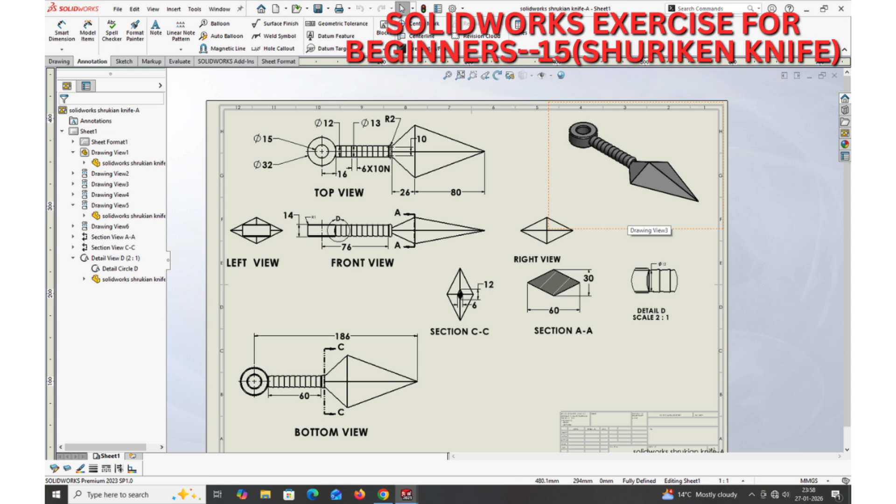Hello everyone, in this exercise of SolidWorks we will create this Shuriken knife. This knife is used in Japan.

Okay, there are the different views of this knife. This is the top view, this is the front view, left view, and this is the bottom view. There are section views also.

Section A, this is section A. Actually this is the parallelogram. Height is 30, 60, and section CC. This is a small parallelogram and the bigger parallelogram.

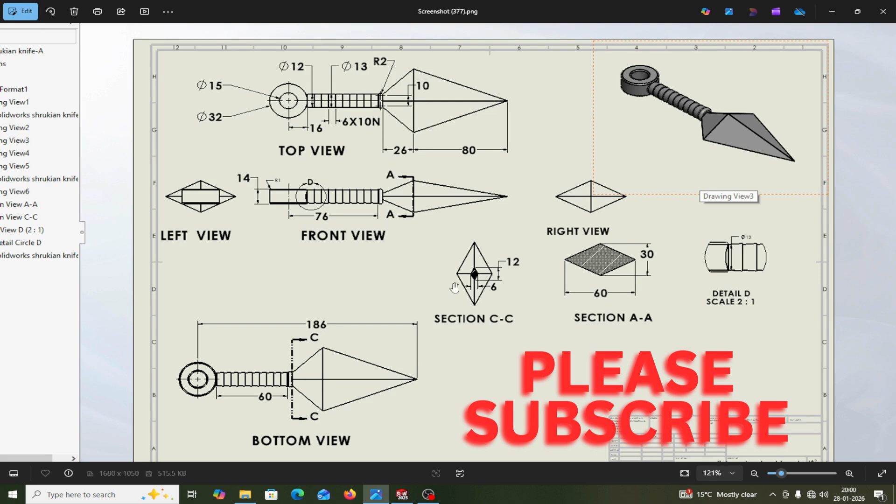Small parallelogram is 6 mm width and height is 12 mm. And this is the detail view of this portion. I will start the detail view of this thing.

The maximum larger dia is 13 mm, 12 mm. First I will draw this circular portion. Dia is outer dia, inner dia is 15 mm, 32 mm is the outer dia. First I am making this one.

Okay, let's start. File, new, part, this one. I am selecting background as plain white and unit system as millimeter gram second. You can select as per your requirement any other systems.

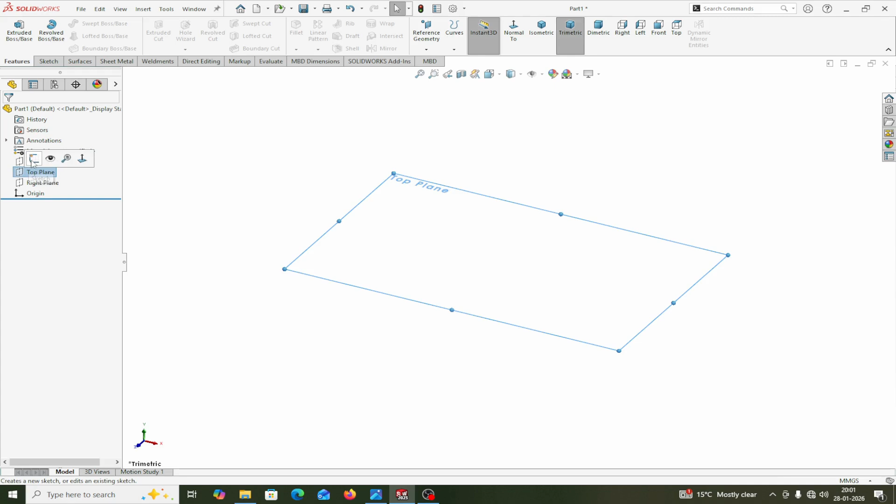Okay, first I am taking the top plane here. Top plane is sketch. I am drawing two circles here.

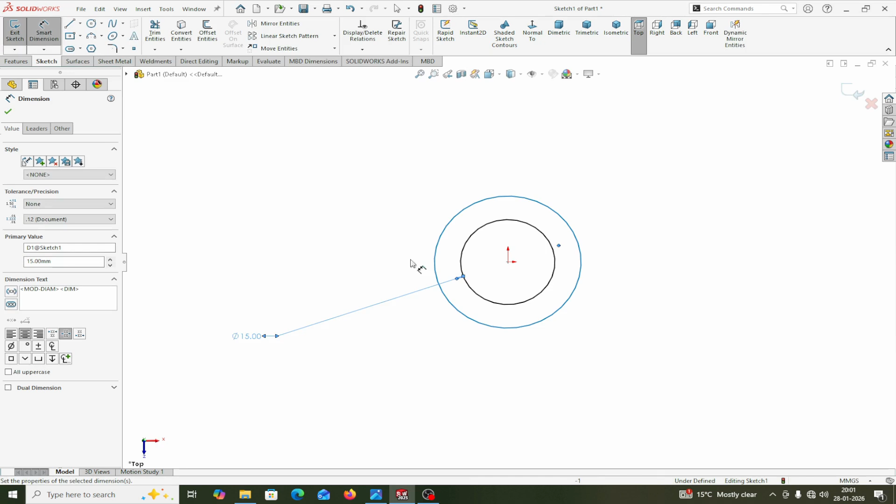This one, this, and this. Okay, right click, select smart dimension. This is 15 mm dia. Inside dia is 15 mm and this is the 32 mm dia as per drawing. Okay, these two dia, this one.

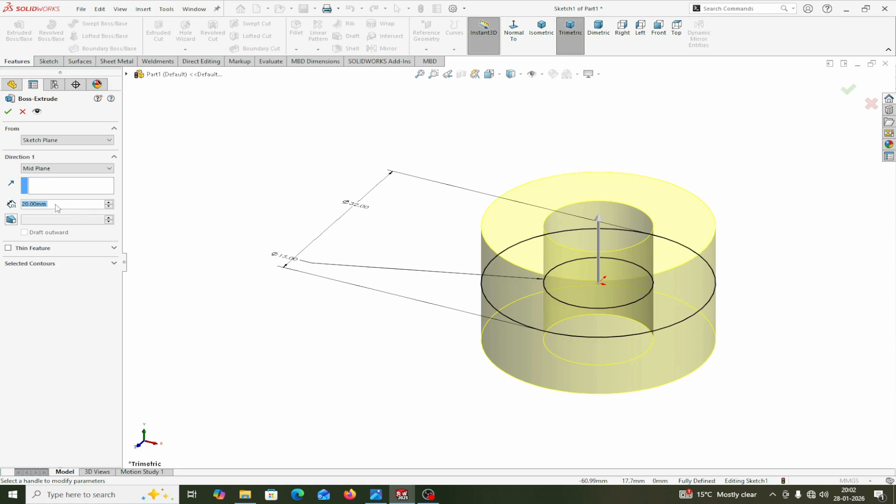Now feature, extrude boss base, I am taking mid plane. Direction 1, mid plane extrusion height, total height is 30, this is 14 mm. This is the total height of this thing. If you see this height, this I have made, this is the 14 mm height of this thing.

Now I will make this one, this inside portion. If you see, bigger dia is 13 mm and this is the tapered part, stepped part. Small dia is 12 mm, 13 mm, and distance between one pattern is 10 mm. These are 6 number of patterns here.

You will see here, total distance is 16 from center to here. Total is 76 from here to here. Okay, from the center point up to the 6th pattern, that is the 76 mm distance.

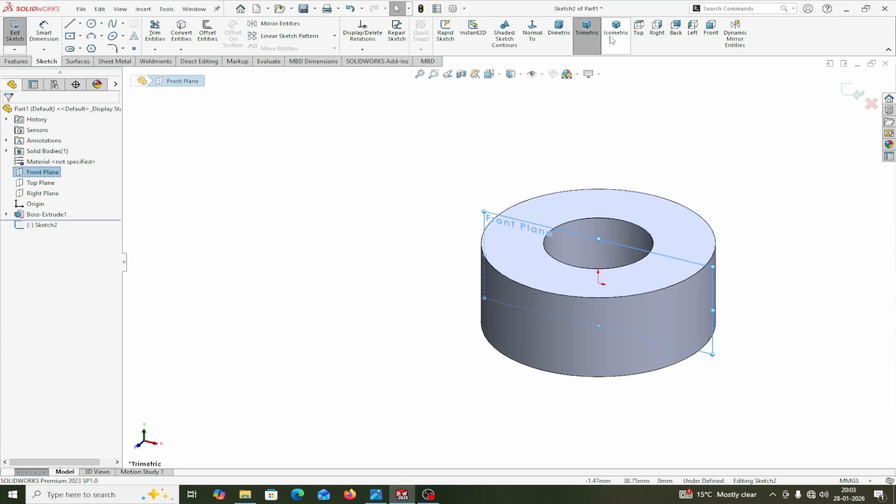Okay, let's make here. Front plane, front plane sketch, normal. I will draw a center line. Center line is very useful in order to draw a proper sketch. It acts as a guide actually.

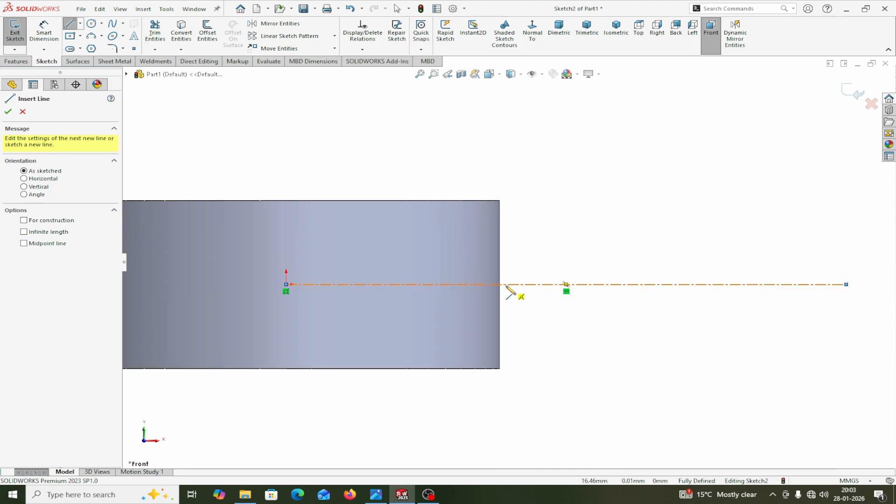This one, first make sure this should be horizontal. Yes, okay. Now I will draw a line from this point, this point, this slightly taper, this is the taper part, and join this one.

Okay, this one. Now smart dimension from this point, select this center line, and if you go beyond this construction line, it will show the dia. If you go below this construction line, it shows the radius. Please note this thing, but this must be a construction line.

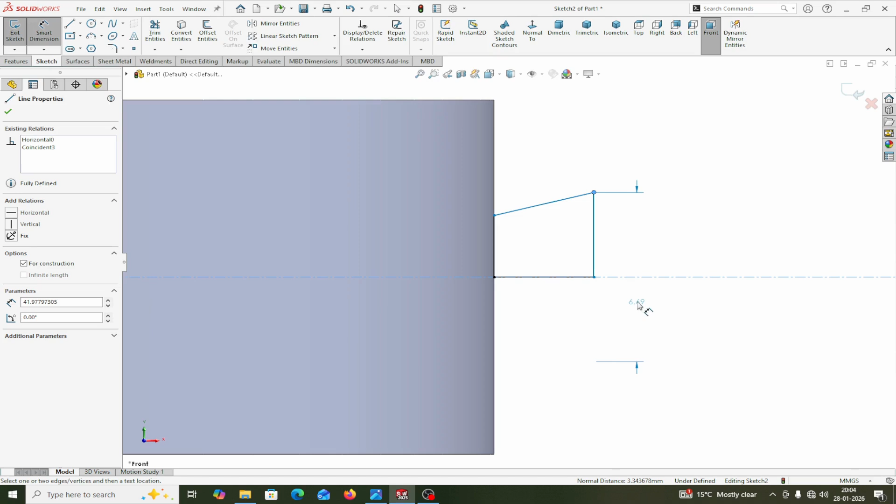Don't select this line, select this line, and this is the 13 mm. Okay, and this point and construction line, this is the 12 mm, and this one, and one more dimension, this one. This dimension is 6 mm. Okay, this one. Oh, this.

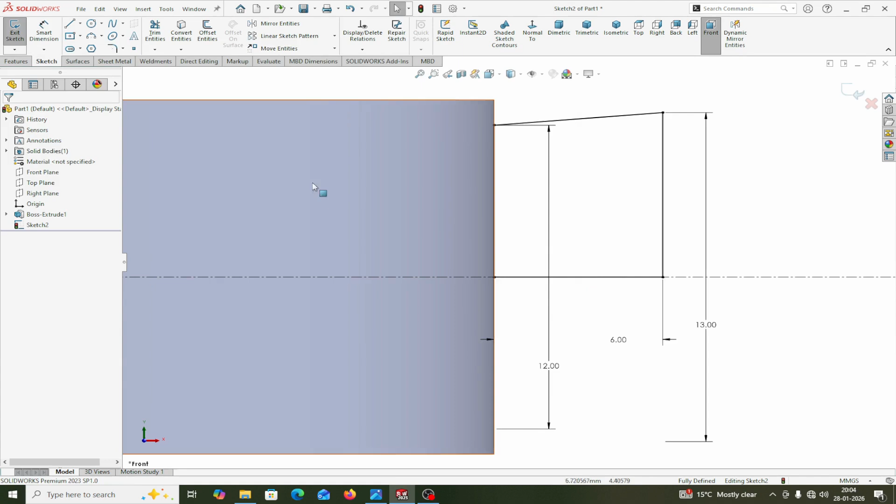Now one more thing, if you see the drawing, this portion, this one, last one. If you see here, this radius is 10 mm and you will see this portion. This center to center distance is 10 mm, radius is 2 mm.

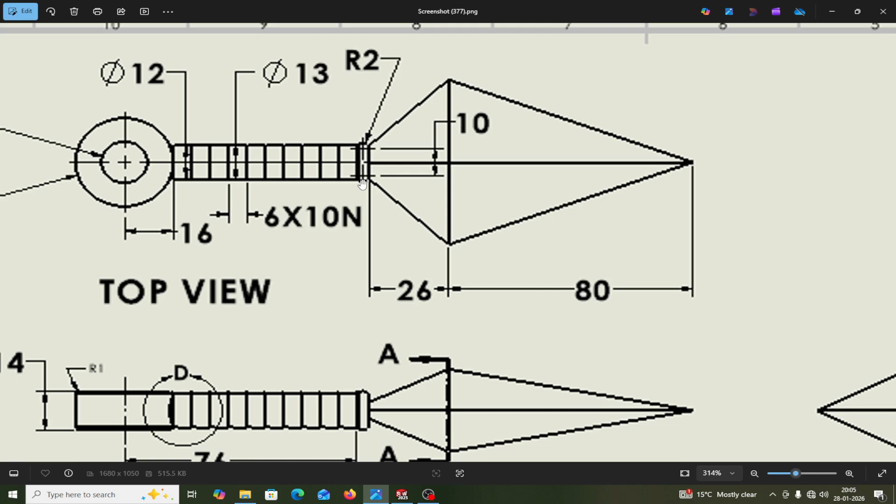Okay, I will draw this one. Total is 14 mm. Total is 10, this one, and 2 plus 2, 14 mm. Okay, total is 14 mm. Let's start. Line, this one.

Don't make the relation here. This, go ahead, then go back, come back. This one, this, and this one. Okay.

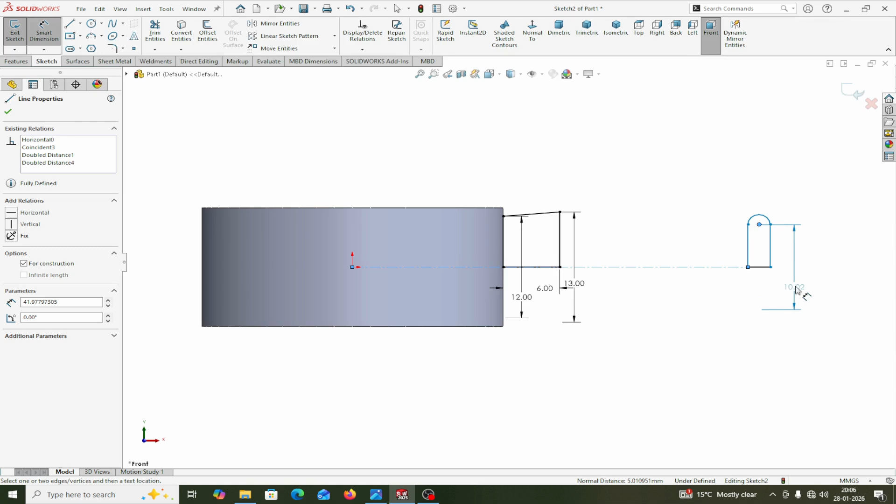Again, select this center point and center line. This will show the diameter. If you go below this construction line, it will show the radius. Please note this thing this way. This is 10 mm only. This is 10 mm, radius is 2 mm, this one.

Now this one. These two lines must be solid lines. Please note, they are two geometries. One is this tapered part, this is this radius part. These two lines must be either straight solid line or construction line.

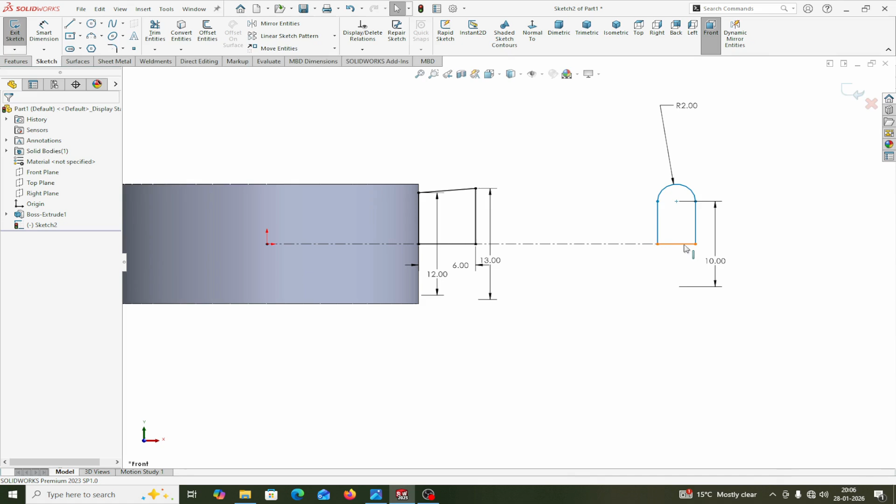In that case, I will make a revolve base feature. Revolve base feature, both are selected. Revolve 360 degrees. Unmerge this one. Please note, unmerge this. If you see in the feature tree manager, there are three parts. Solid body 3 is, one is this one, second is this one, third is this one.

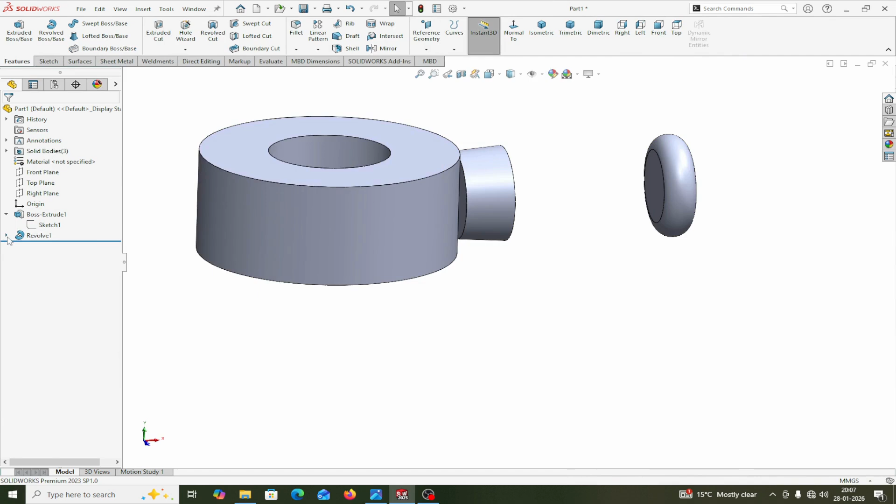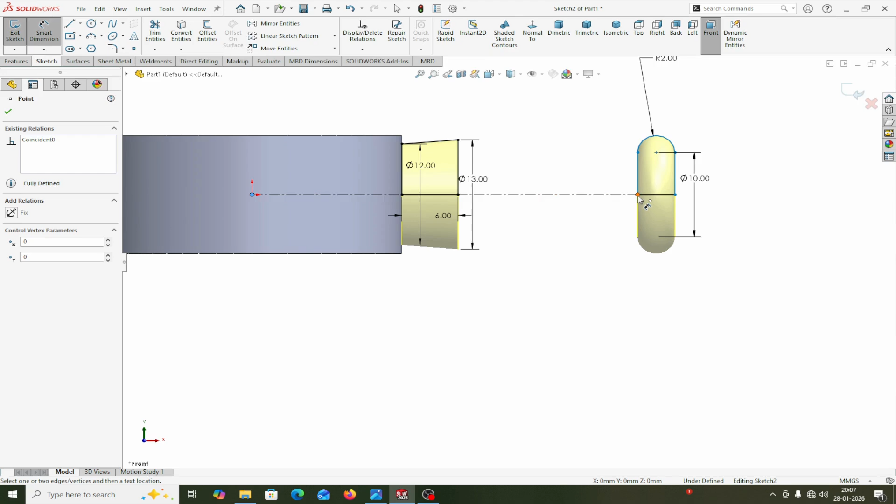I have to make these 10 number patterns. So this is 6 mm, 6 mm, total 10 mm. 6 into 10 is 60. So this distance from here to here, that is 76 mm. Please note, I have calculated this because this distance is 6 mm. I will make 10 number of patterns of this size. So from center to this one, this diameter is 16, diameter is 32. Half of this is 16. 16 plus 60, that is 76.

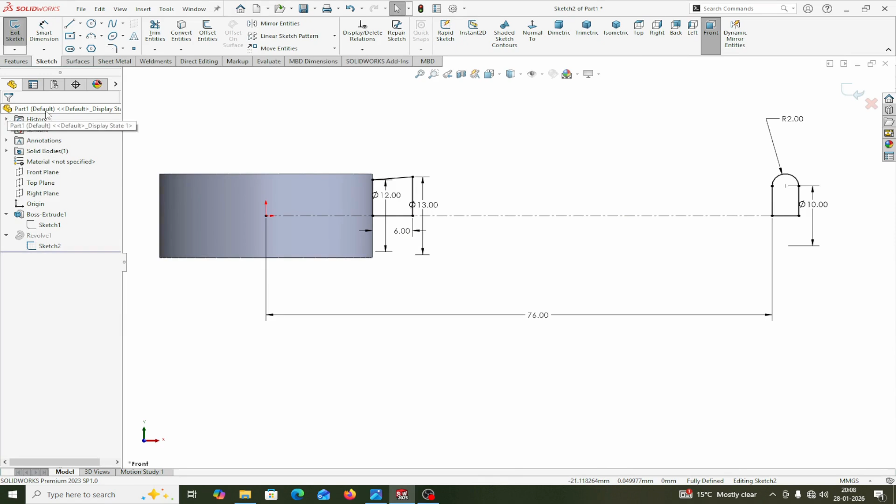Now these are the three feature tree manager. You will see there are three bodies unmerged. This one, this. Okay. Unmerged, red, okay, from here. Later on, I will merge this thing.

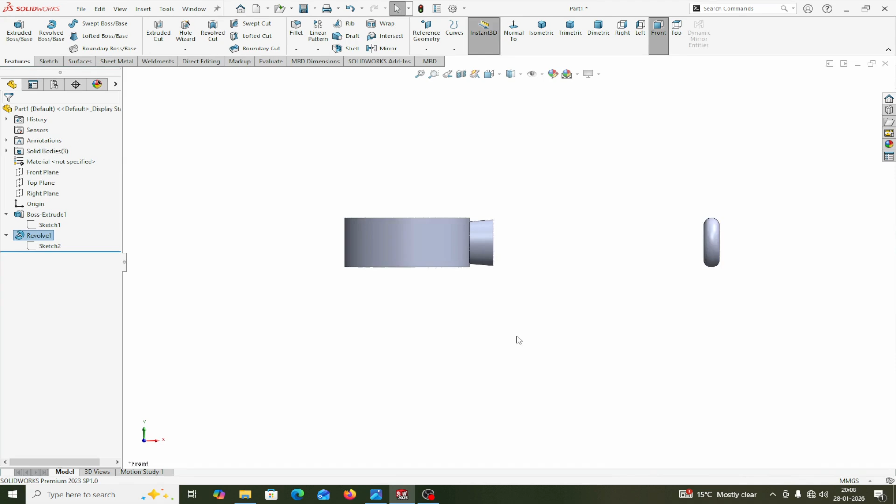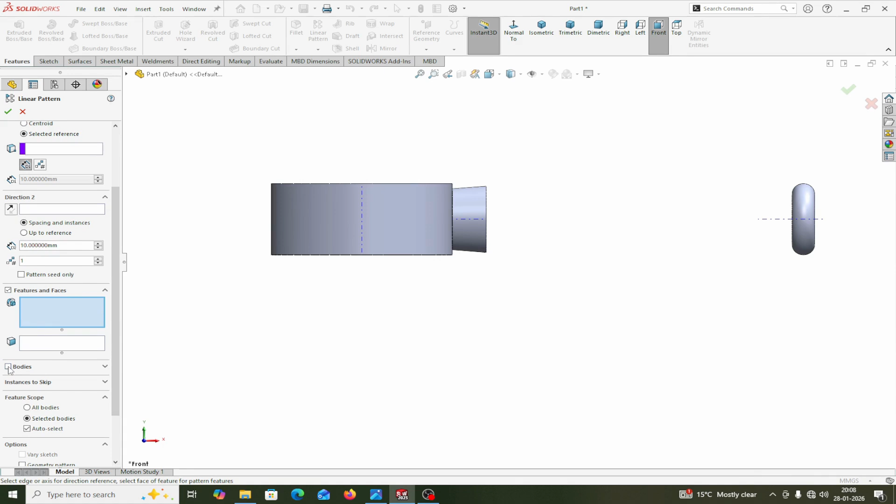Now I will make a 10 number pattern of this one. Go in the linear pattern. From here, select this temporary axis. Select not this. Clear? Select the bodies. Select the bodies, this one, this body, this body. Now select the axis. This one, this one.

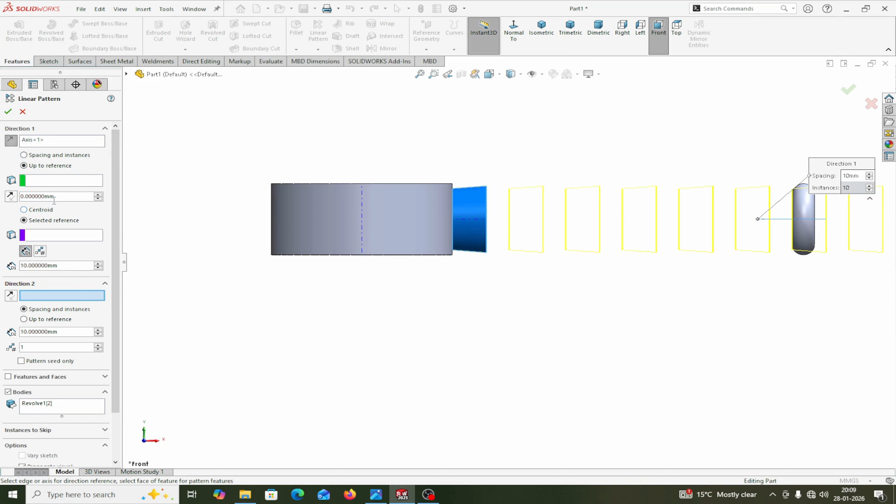If you take up both options, you can use up to reference. Up to reference is this reference. This reference. Up to reference, this one.

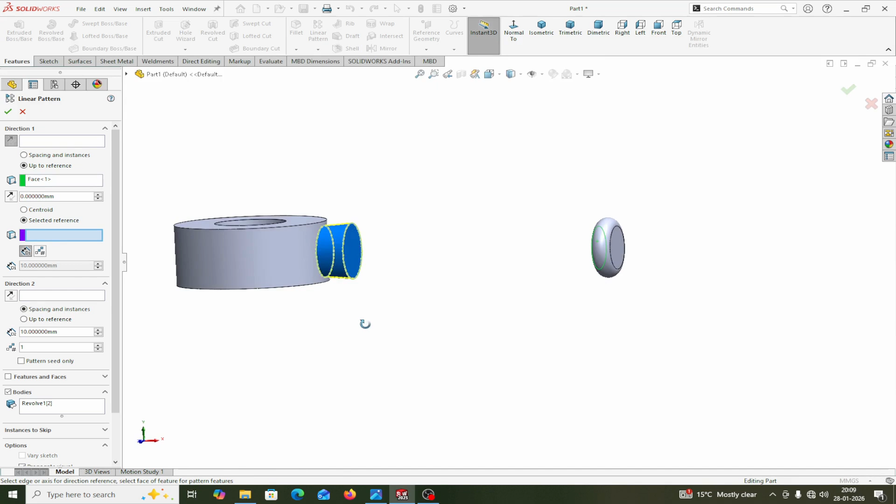And selected reference, this one. Direction, this one. Please note this thing. I am using the second option, up to reference. Direction, this axis, temporary axis, and face. This is up to reference. Up to reference means this one, this one. Selected reference, this face, this one. This face, there are two options. You can select this one also, this one.

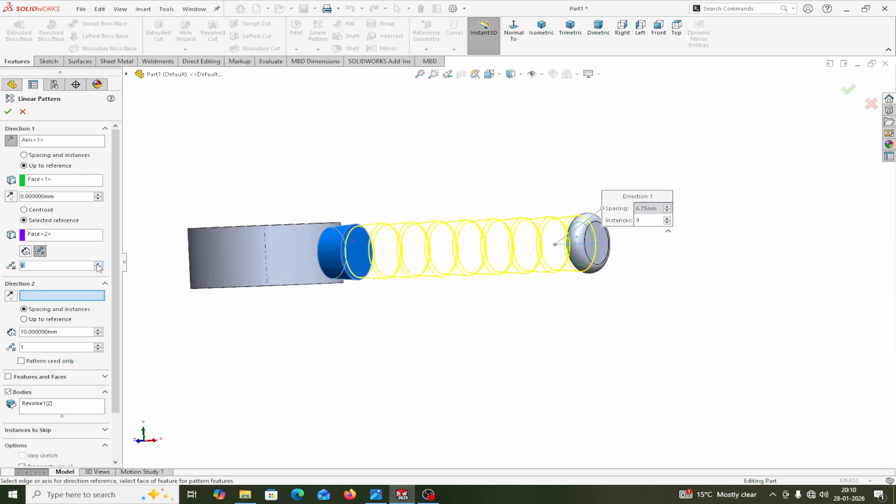9 number I have made, because from here to here distance is, total distance is 60 mm. Okay, now hit OK. Now you will see there are 12 bodies here. This one.

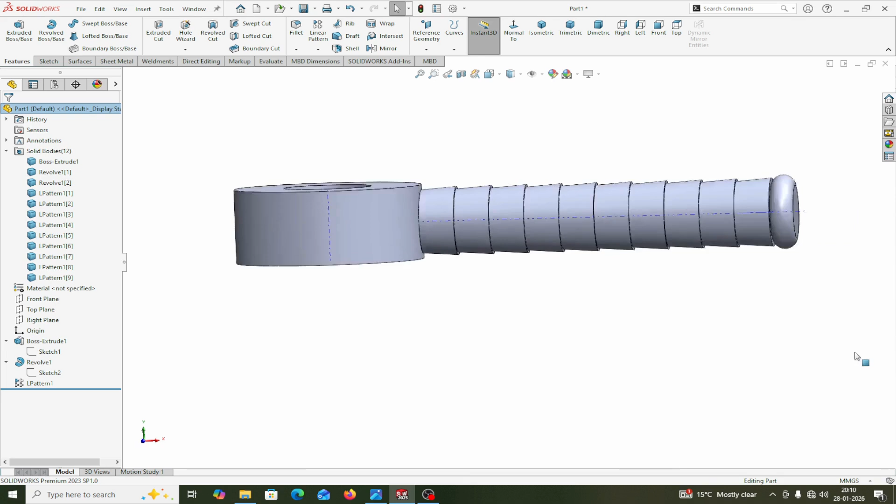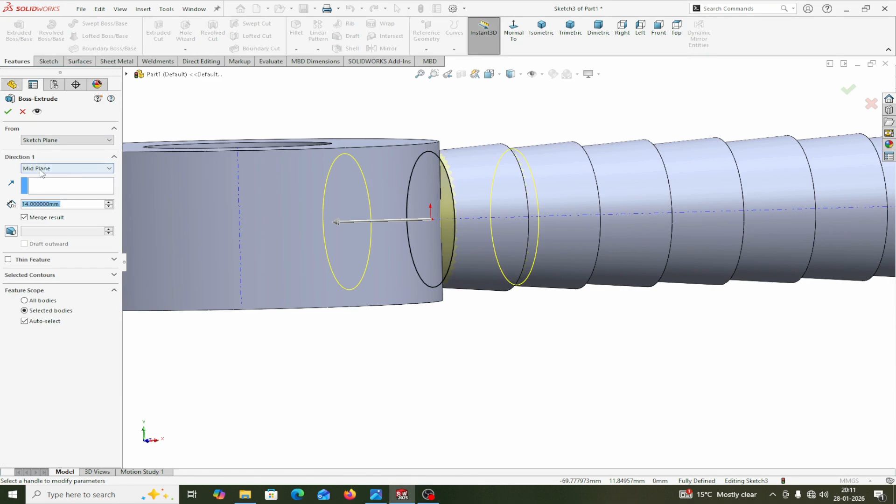First I will merge this corner body, this pattern, and this one. How will I merge? First I will merge this one. You will see there is a gap here. There are two ways of merging. You can go in direct editing, then combine here, or you can select this gap face, sketch, convert entity, feature, extrude boss base. But for direction one, select the option up to surface. Which surface? This circular face. This will merge.

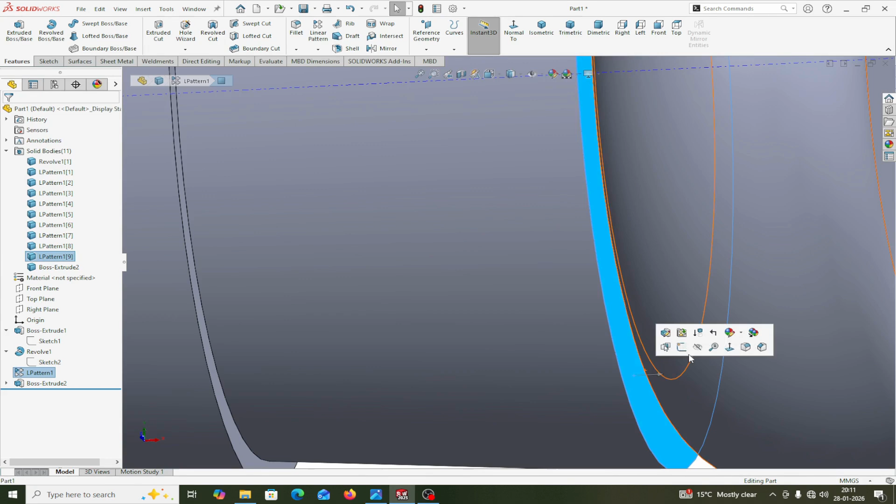Okay, now this is merged with this one. In the same way, you will find there is also a gap here. You will see this gap. So select this face, sketch, convert entity, feature, extrude boss base. Up to surface, which surface? This one, this one.

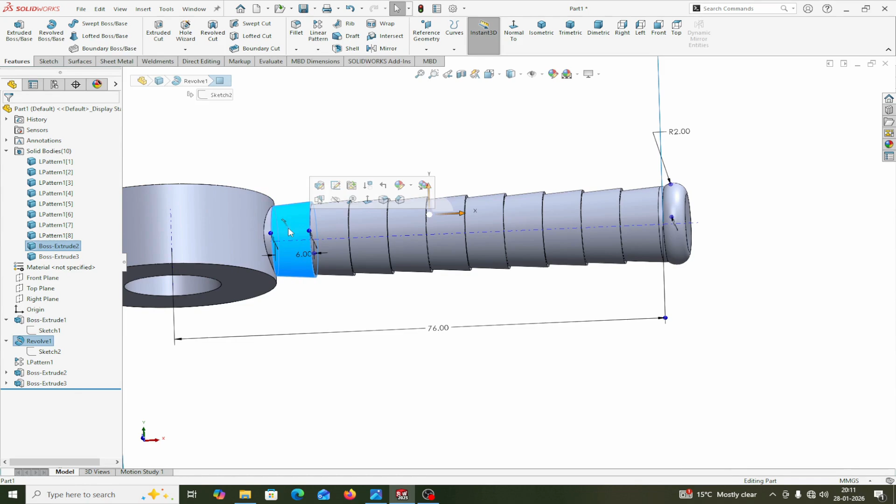You will see this body is merged, last pattern is merged with this one. You will see this one and this one also. Now there are 10 bodies left, this one.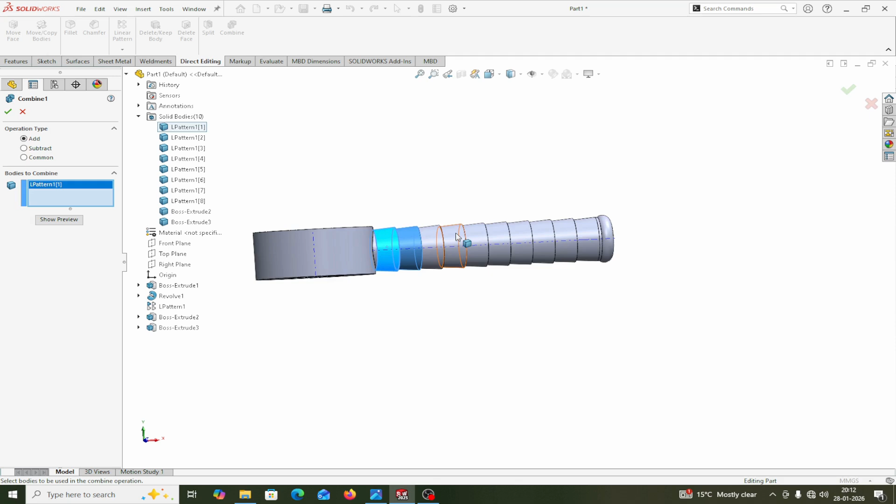Now I will merge, combine these bodies. How will I combine? Go in direct editing, combine, add this one. From here, open the tree manager, select this one. You can also select from the graphic area, or from here tree manager, solid body, this, and hit the right button. All are combined. Now you will see in the feature tree manager, there is one body that is combined, this one. Now this is combined.

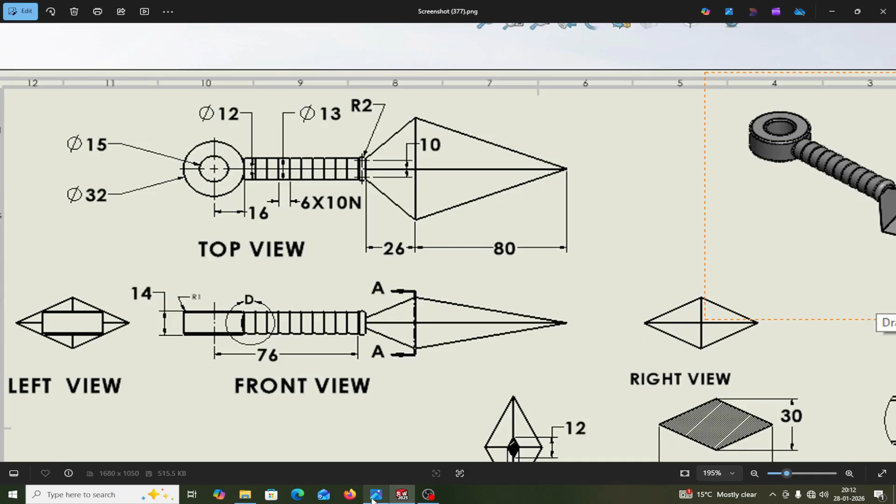Now if you see the drawing, now I will make a small parallelogram here on this face, this circular face. I will make a small parallelogram 6 and 12 mm. Later on, at a distance of 26, this parallelogram will be 30 and 60, and then I will make a loft feature, and again then at a distance of 80. Then at 80, I will make only a simple point. Then first I will loft this part, and then second is this loft part.

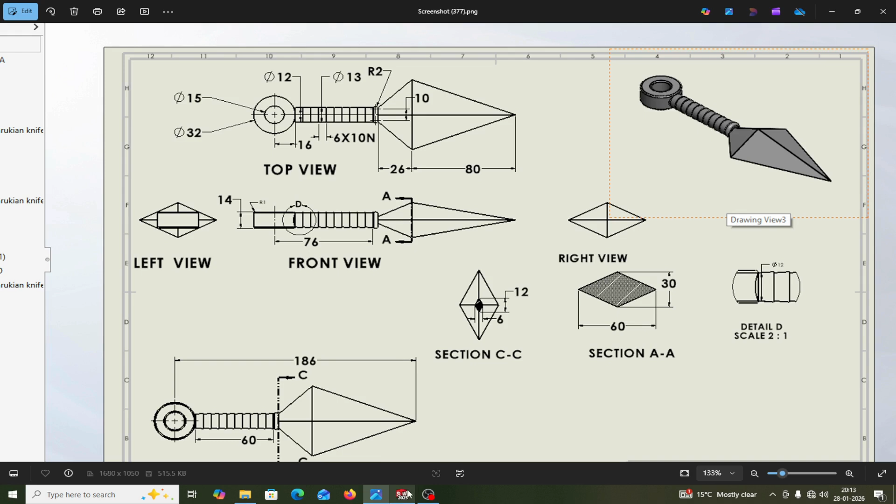Okay, this one. Now hide this temporary axis, this one. Hide. Now select this face. Select this face, sketch, normal.

Normal. First draw a center rectangle, then make this construction line. I will draw a parallelogram here. Select this line from midpoint to this midpoint, this midpoint, and this midpoint. Okay, small dimension. Select this dimension, vertical dimension is 6 mm. And this dimension, horizontal dimension, is 12 mm. Hit right button. Okay, this is one parallelogram.

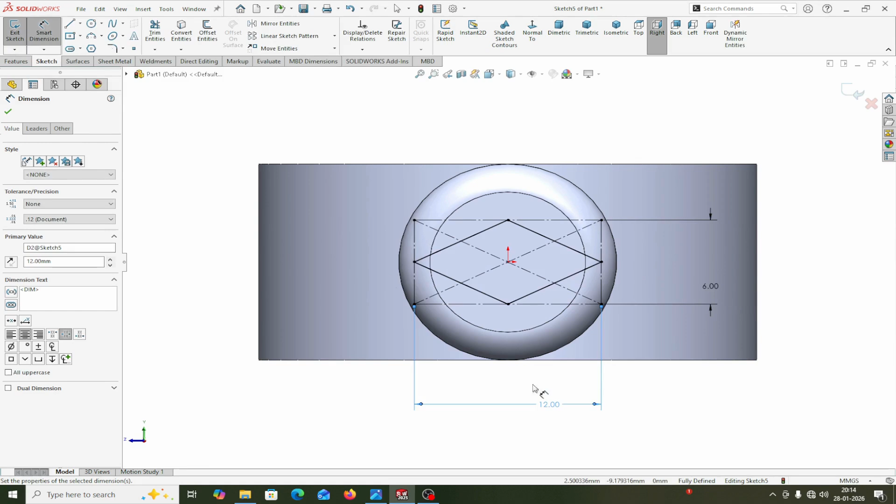Now another parallelogram is at a distance of 26. So out of the sketch, in the feature, I will make a plane here. Select this face, and at a distance of 26, I am making a plane here. Select this plane, sketch, normal.

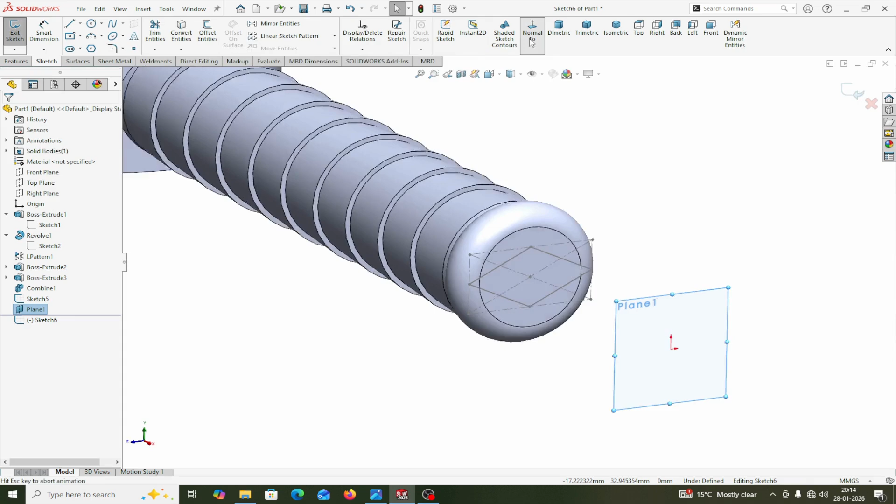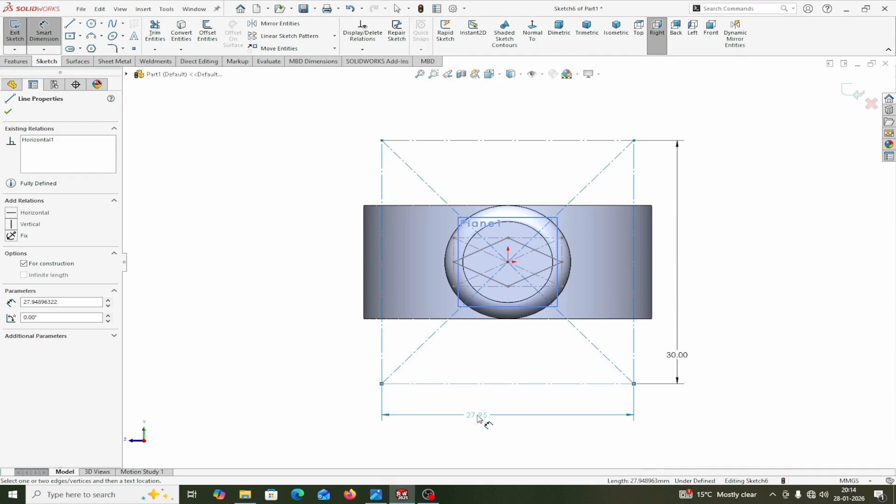Normal, again same thing. Draw a rectangle, construction right angle, from here give the construction. Dimension, this dimension is 30 mm. This dimension, horizontal dimension, is 60 mm as per drawing. Now hit dimension, and again draw a straight line from midpoint to this midpoint, and this midpoint, and this midpoint, hit right button.

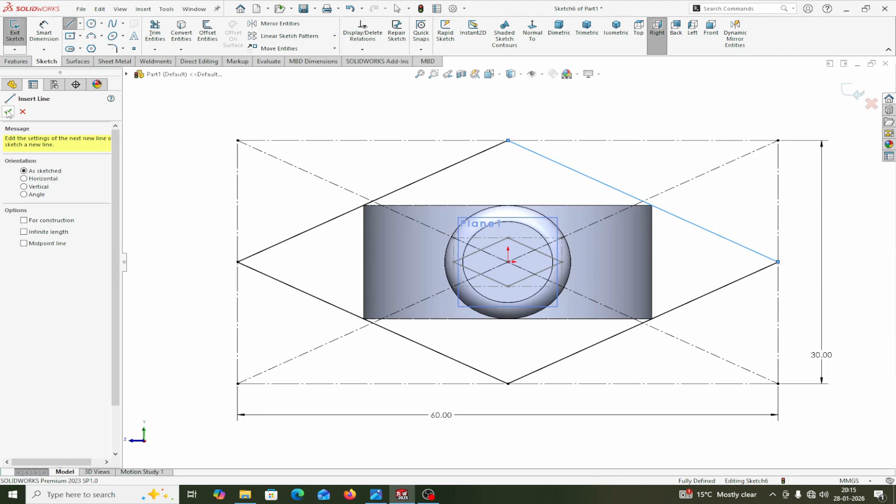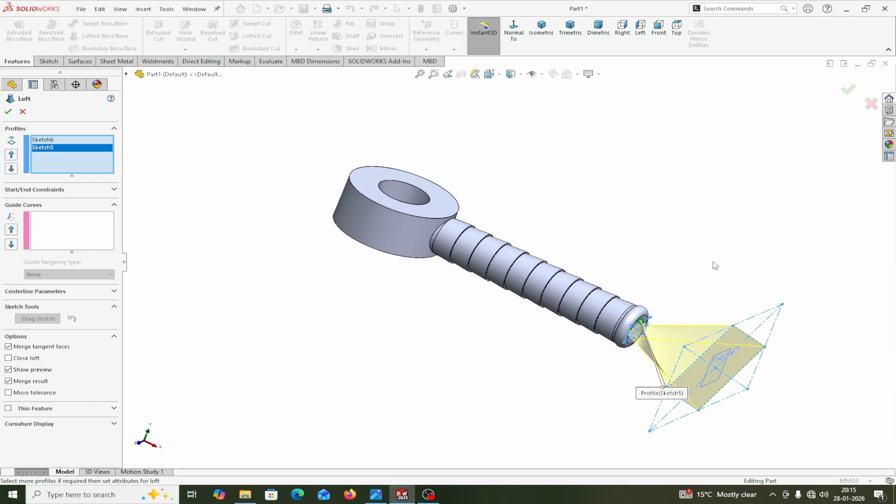Okay, now there are two sketches. Now I will join this with the help of the loft feature. First out of the sketch, then lofted boss/base, and select this upper point, similar point, and this one. Automatically the system takes another similar point. Okay, select this point, or clear in this profile box, select this point and the corresponding point. No guide curves needed, no need to touch other parameters.

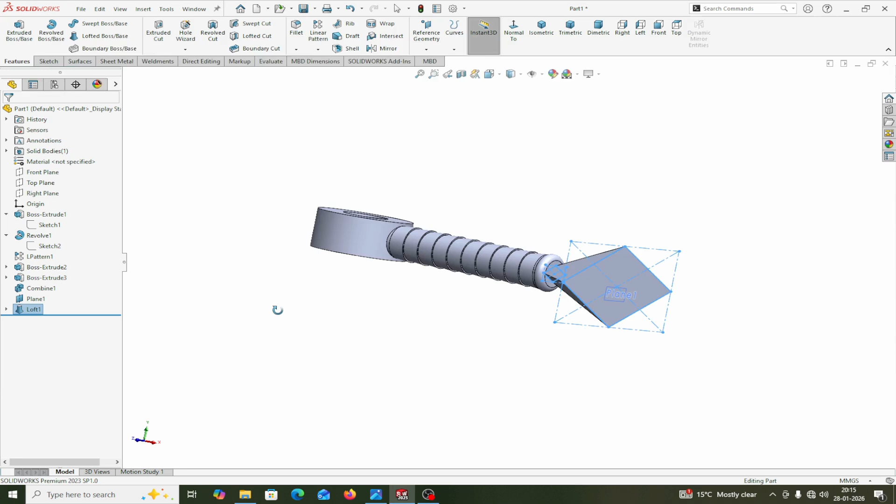Okay, this is simply the part. Now hide the plane, hide this first plane.

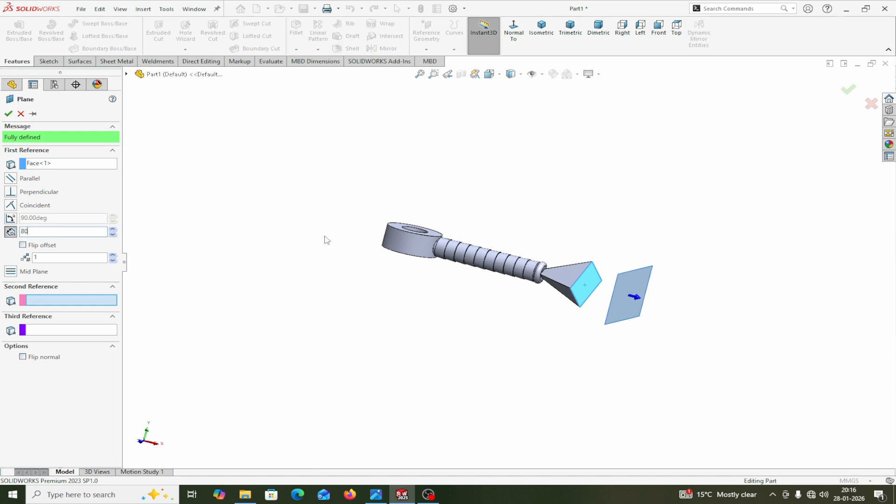Okay, now select this plane face, in features, plane, select this face. I am creating another plane at a distance of 80. Another plane is created. Now select this plane, sketch.

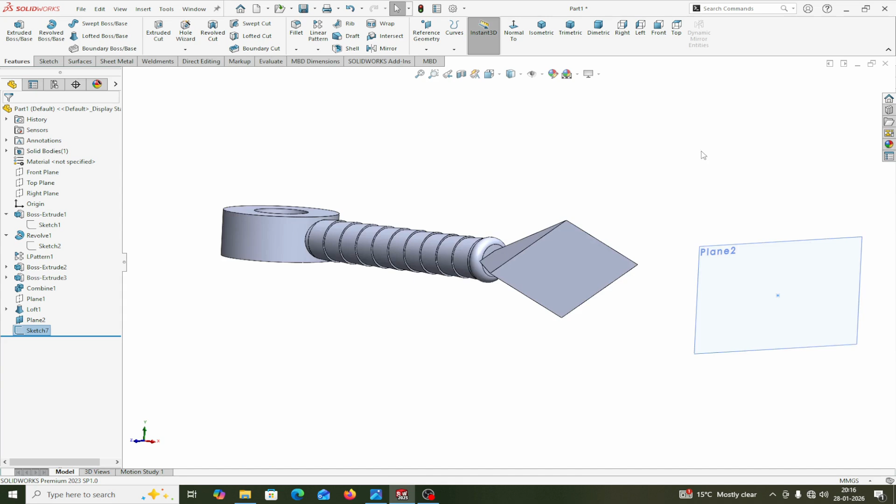Okay, normal. Now simply, in the sketch you take a point, and locate this point here at the center point, hit right button. Okay, out of this sketch, now I will make a loft. How? Feature, lofted boss/base, select this point which is automatically selected in this profile box, and select this face. This is merged with this one.

In this way, select this cell and hide it.

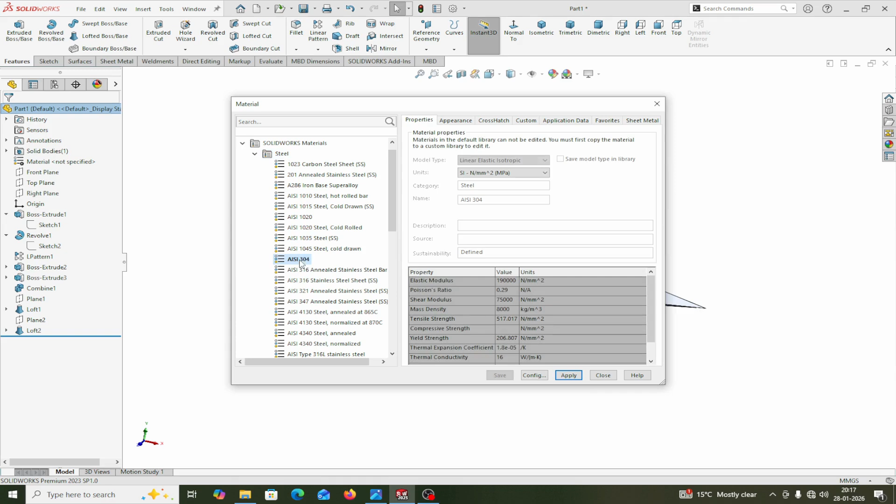Okay, you can apply any material. You can apply from the part, right click here, material. If you want to select any other material in addition, you can select from here material, or you can select edit material. You can select any material, for example AISI 304, apply, close.

Okay, you can also give the appearance here, appearance, black position, I am giving this color, hit right button and close here.

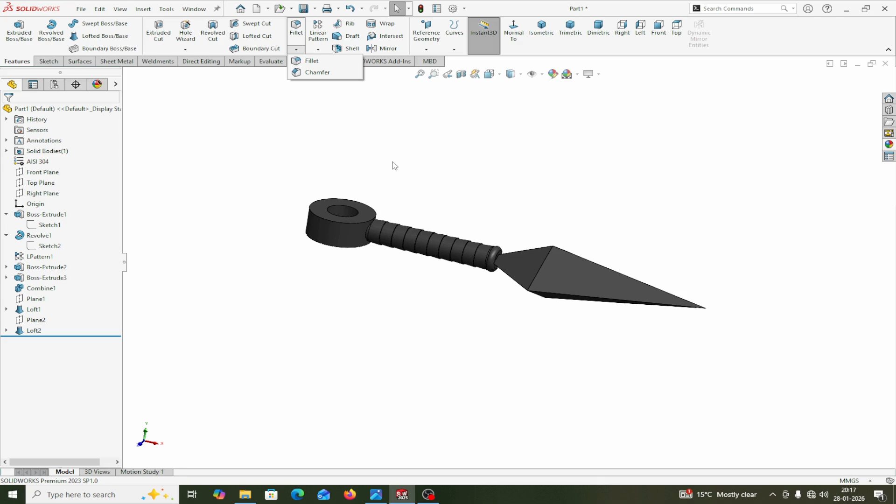Okay, you can also provide the fillet. In engineering, during the creation of any part, there should be no sharp edges, because sharp edges are a very critical factor in part design. So I am taking fillet, and taking approximately 1 mm or 2 mm fillet. Select this point, and another face, this one and this one, in this way.

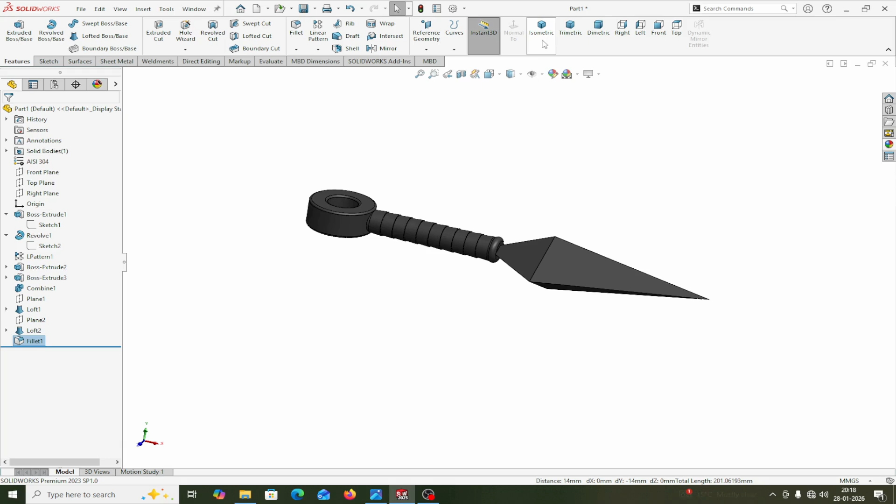Okay, and in this exercise we have learned the loft boss/base, revolve boss/base feature, plane creation, fillets, etc. This is a simple exercise for the beginners. I hope you would have enjoyed this exercise.